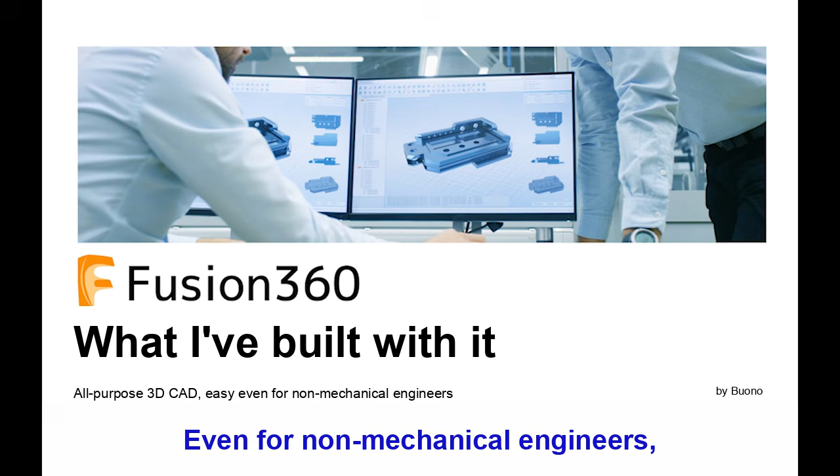Hi, I'm Buono. Today I'll show you what I've built with Fusion 360. Even for non-mechanical engineers, this is a 3D CAD tool you can pick up fast.

That's today's topic. Two things to cover: what Fusion 360 is and what you can do with it. I'll walk through both quickly.

A quick introduction. My name is Buono, and I work as a hardware engineer. I share content about technology and DIY electronics. That hobby actually paid off recently. I wrote for Interface magazine from CQ Publishing in the July 2021 issue for a feature called the IoT Globe. It's for IoT beginners, covering how to build things step by step with the full picture. Check it out if you're interested.

Now, some background. I usually do DIY electronics on my own. Working solo means firmware design, circuit design, enclosure design, all on me.

And for enclosure design, there are a lot of tools out there. The one I found was Fusion 360. It's really good, and even though I'm not a mechanical engineer, I picked it up easily, so I wanted to recommend it to you.

Let's start with what Fusion 360 is. In one line, it's an all-purpose 3D CAD tool. It has three main strengths.

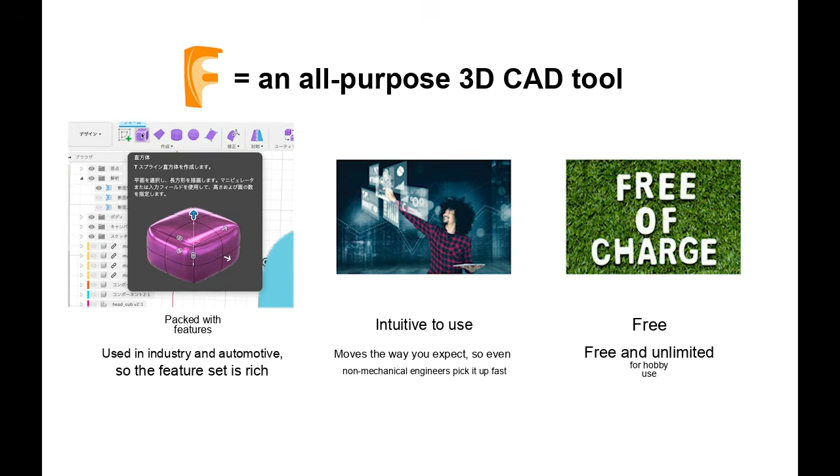First, it's packed with features. It's widely used in industry and the automotive world, so the feature set is genuinely rich. For DIY electronics, you may never touch most of those features, but pretty much anything you want to do can be done in this tool. For surface design, for example, you can shape smooth, curved surfaces, or cut a section to look inside. All of that is built in.

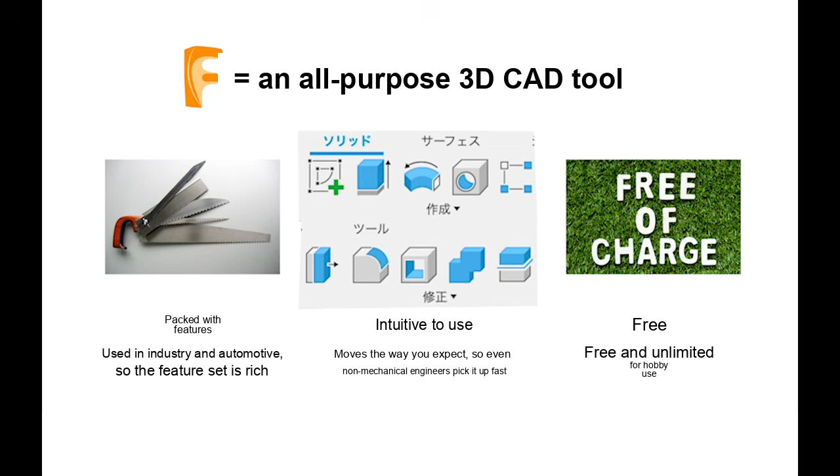Second, it's intuitive to work with. Even I was up and running fast. Usability is often the sticking point with 3D CAD, but out of all the 3D CAD tools I've tried, Fusion 360 was one of the easiest to handle. It really does feel intuitive, so I'd encourage you to give it a try.

The third strength is that it's free. With all these features and software this polished and easy to use, hobby use is completely free. Put those three together, and that's Fusion 360 in a nutshell.

To get more specific, for DIY electronics, I mainly use it in these ways. First, output to a 3D printer. I think this is the main one. When you design your own enclosure and want to prototype it, a 3D printer is by far the best match.

Even when I'm not printing anything, I use it a lot for solo brainstorming. There's a limit to sketching on paper. Which parts, how they fit together, whether the whole thing is even feasible - when you're thinking that through, 3D CAD beats paper, easier to verify, and ideas grow. It's a sketchbook too, worth keeping in mind.

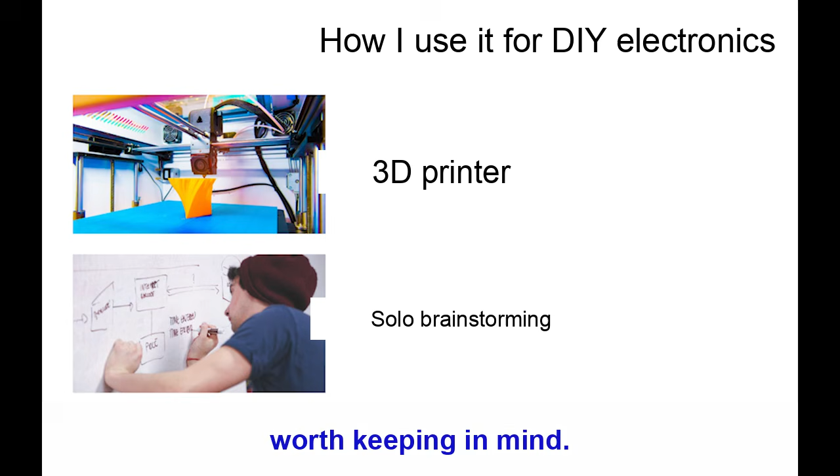Now let me show you some things I built with Fusion 360. I'll switch to my screen and keep talking there. Here are a few.

First up is a gadget I built called the cocktail cube, shaped like an ice cube. I've covered what this gadget does in another video, so please take a look at that one. I designed this enclosure in Fusion 360 as well.

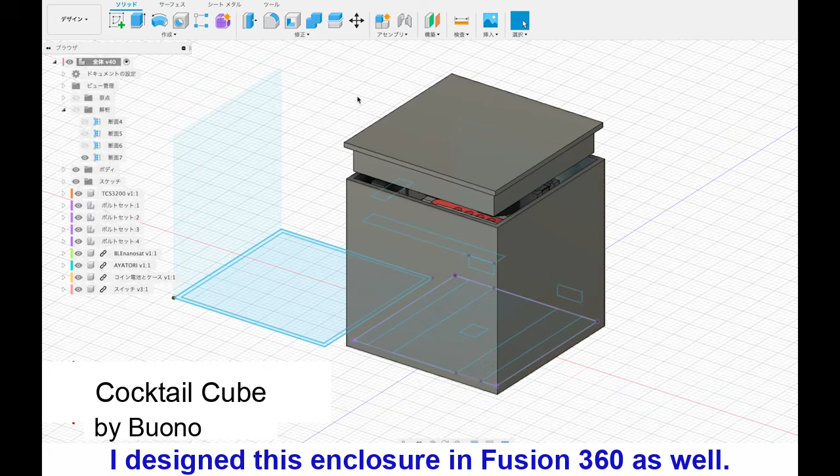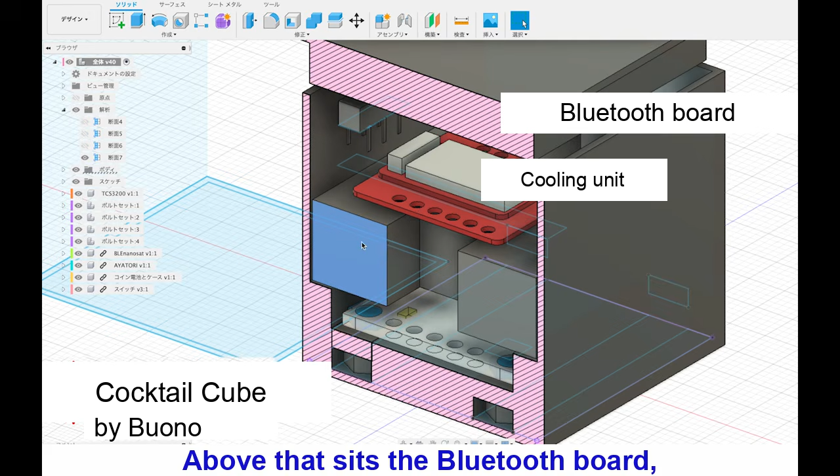Here's what's inside. Fusion 360 can do section analysis like this, so you can easily see inside. Looking inside, it's split into several layers. The bottom layer holds a color sensor. Above that is a case for something chilled that stands in for ice. Above that sits the Bluetooth board, which lets it talk to a smartphone. Above that is a coin cell, and then the power switch. All of this is sealed inside the ice shape, and you drop it into your cocktail.

Next is Memie, a gadget I built for keeping an eye on kids.

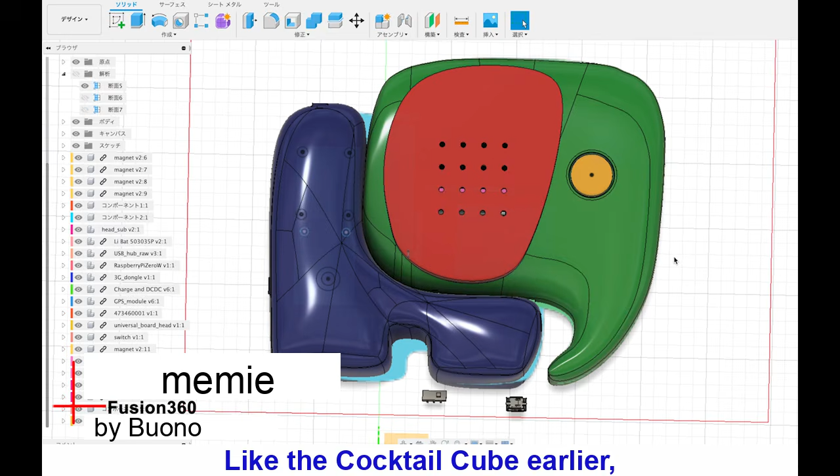Like the cocktail cube earlier, I made this one for a hardware contest called GUGEN. I've covered how to use it in another video, so please check that one out too.

Here's a quick look inside. If I take a cross-section, it looks like this. Changing the level a little, we get this view. Looking around here, there's a Raspberry Pi, an interface board, and the wiring.

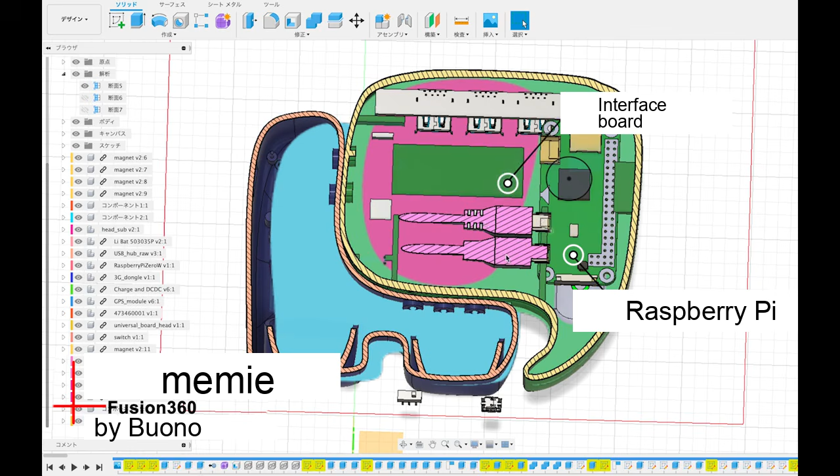To join the head and the body, there are magnets in 5 places here. You can't see it at this layer, but the Soracom Air module is right here. There's also a lithium-ion battery, and its control board sits in this section. Go one layer down and there it is.

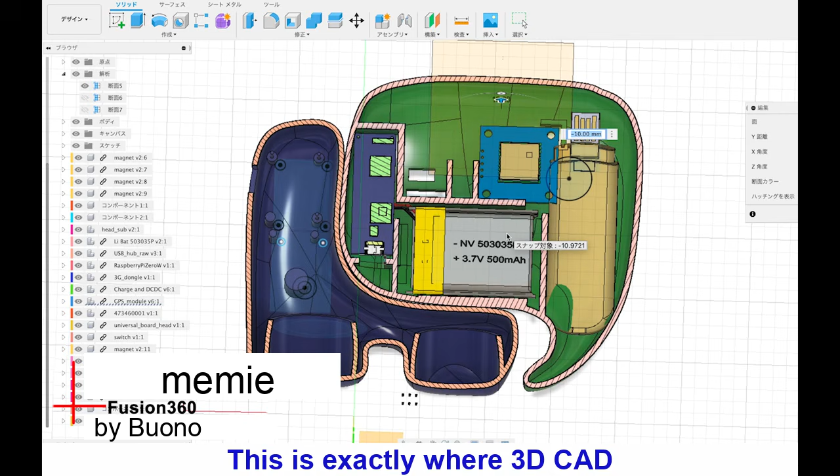When you pack this many parts in, paper really doesn't cut it. This is exactly where 3D CAD shows its strength, and Fusion 360 was invaluable here.

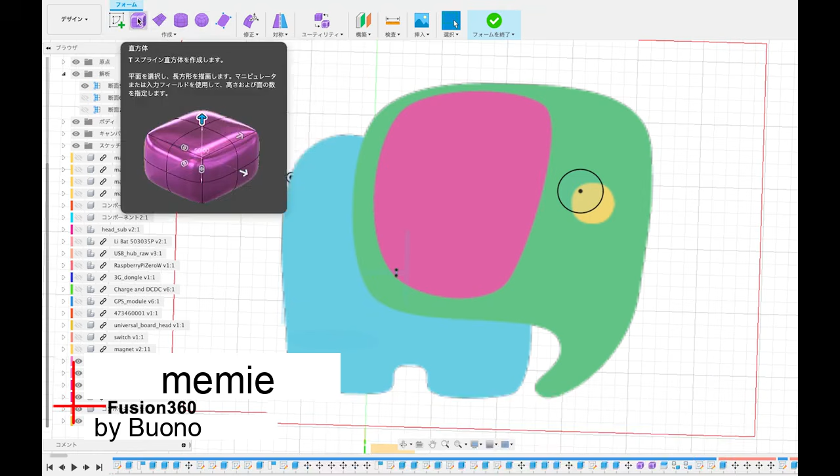As for how I designed memie's elephant shape, it started out like this - just a flat 2D image. I took that illustration into 3 dimensions using Fusion 360's Create Form feature, which lets you build curved surfaces and shape the curves until they looked right. That's how I built memie's enclosure.

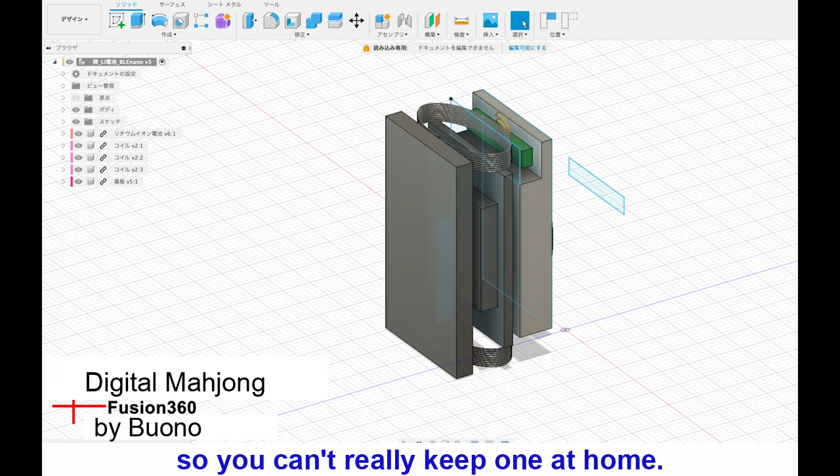Next up is a digital Mahjong gadget I came up with. I never actually built it, but I used Fusion 360 while brainstorming, so I'll show you. In short, it digitizes Mahjong. I was playing a lot of Mahjong at the time, often on an automatic table, but those are loud and huge, so you can't really keep one at home. I wondered if I could digitize it and get the same automatic table behavior in a smaller form.

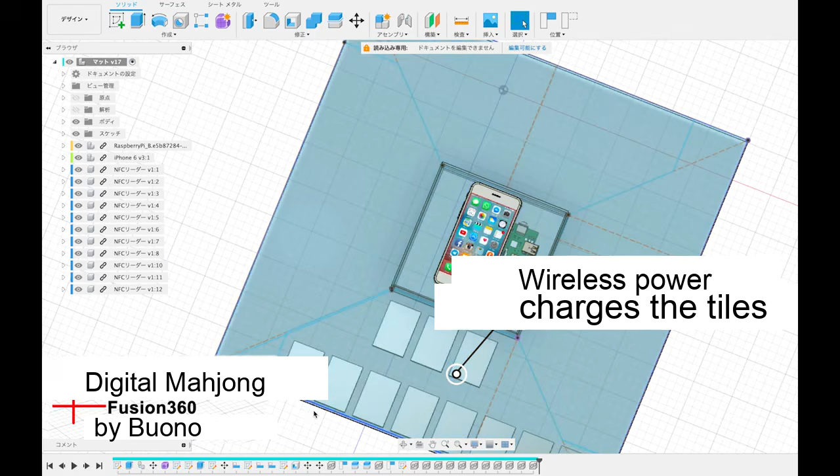The mat and the tiles work as a pair. Inside each tile, there are several components. It's a bit hard to see, but there are coils placed around it, along with a lithium battery and a display. The mat has coils too, so just like charging an iPhone, when you set a tile down here, the mat supplies power and the tile face appears on the display.

That was the system I had in mind. The problem was the budget. Each tile came out at 2,000 or 3,000 yen, which made it hard to justify, so the plan is on hold for now. It's great for brainstorming, so I wanted to show it.

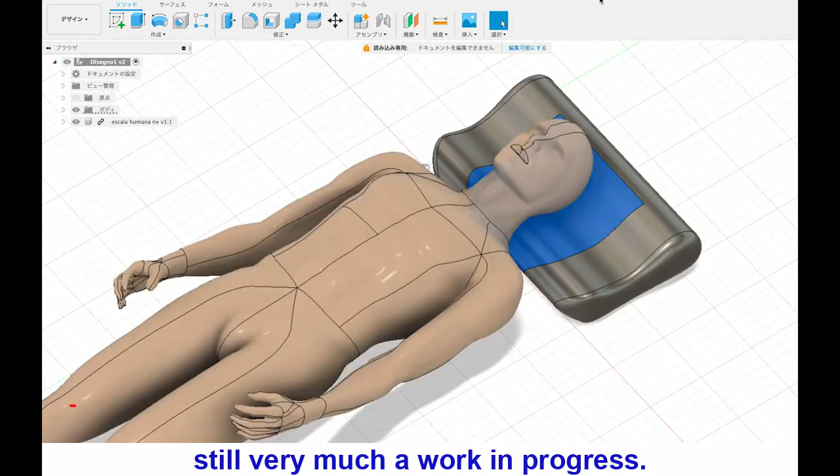Here's another brainstorm, still very much a work in progress. When I was building a pillow gadget, when I'm working out where each part goes, I use Fusion 360 for that.

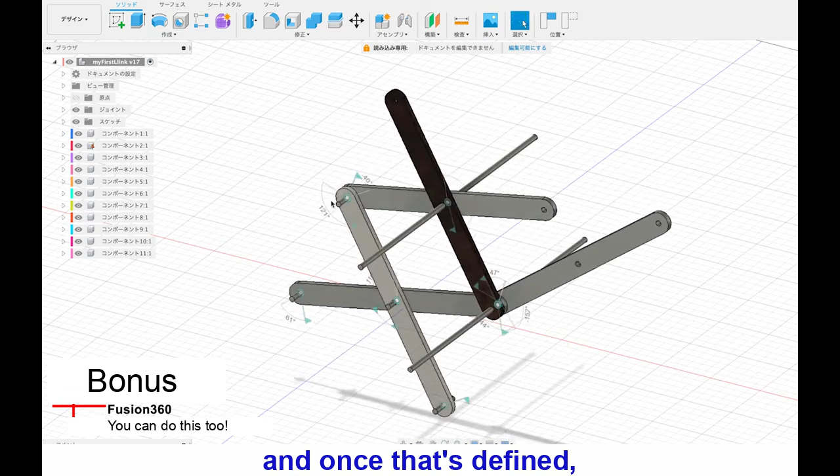One more thing, as a bonus, Fusion 360 can also animate motion. Like this, you can tell it which parts are linked together, and once that's defined, moving one part shows how the others move, so you can test the mechanism.

So that's a tour of what I've built, shown on my computer screen. I've covered quite a few things, but what I most want to get across is that it's just plain fun. As I said at the start, it's intuitive to use, so the picture in your head takes shape fast. Your ideas keep expanding, and you can keep refining your own concepts. That feeling is something you have to try yourself.

I'll say it again, it's free, so download it and give it a go.

One last thing, let me recommend a book - this one, Fusion 360 Modeling Master. I used it a lot. It walks you through phone stands and small containers as hands-on projects, so you learn the workflow. It's written for beginners and very clear.

Recommended. All right, to wrap up, Fusion 360 is great even for non-mechanical engineers, an all-purpose 3D CAD tool. If you want to use a 3D printer or even just brainstorm ideas, please give it a try.